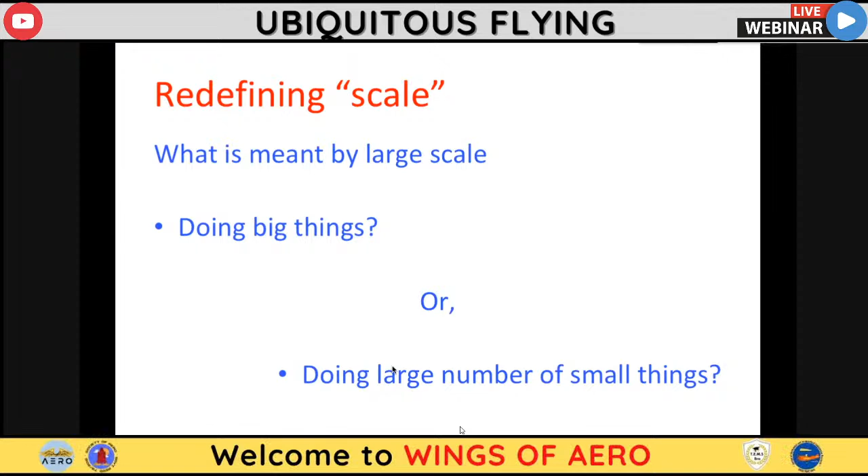What we want to do is redefine what is meant by scale. We want to see how to scale up things, and to scale up things, it is not required for you to actually make large things. You don't need to have a large airport, you don't need to have a large plane, you don't need to have a lot of things that are large. Instead, how about flipping it over and saying, is it possible for us to actually have a large number of small things? So start with small things, but actually make them in large numbers and distribute them all over. That's the kind of paradigm I'm going to be talking about in the context of aviation here.

So what is this talk all about? Technology drivers for the next generation of aviation is what we are going to be talking about. Fundamentally, there are a couple of enablers here, which is the leaner, meaner aircraft and engines enabled by 3D printing - metal 3D printing and 3D printing in general is very important. And the next thing that's actually a disruptor is electric aviation. Why is it a disruptor? Primarily because - and I'll pause here to point this out, it'll come back in a while, but it's very important to catch this early on in this talk - why electric aviation is a disruptor.

So if you look at the trends in electric vehicles happening today, we are still having electric cars being cheaper than IC engine powered cars. And we want to also look at the range you get with a single charge compared to what you actually get with a single petrol tank filled with petrol.

You will find typically that the ranges are getting pretty good, but still a bit short. So you're probably somewhere like 70-80%, and people say that's fine, that's fair, that's reasonable. In fact, if you think about how IC engine cars have performed, you probably don't need that range most of the time. It's just that you don't want to be filling petrol every day, and similarly you don't want to be charging your electric car every day. You might forget, you may have some problem, and so on. So you don't want to have this range anxiety. That's the issue they have.

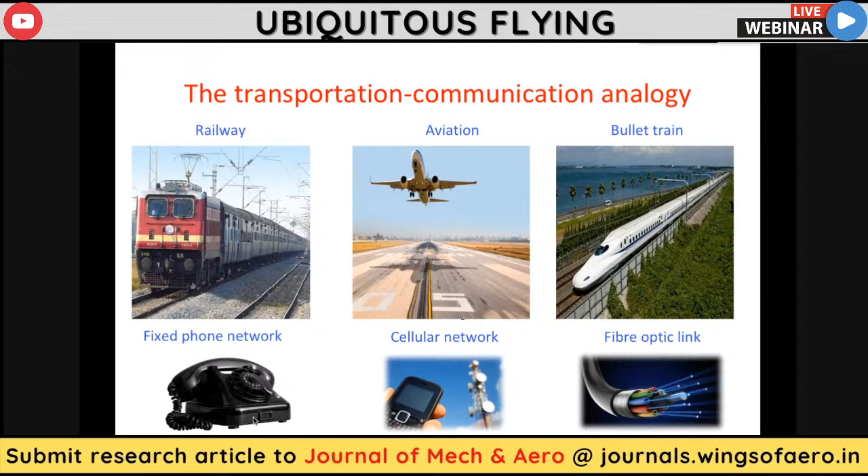Of course, the skies could get too crowded if you try to push this. So if you have point to point travel where you want to go very fast, you can do bullet train, or more recently Hyperloop is coming up as an even better option. That's for another talk some other day on how Hyperloop could be much better than even bullet train. That's kind of similar to a fiber optic link, and people actually do fiber optic links rather than go wireless all the way around.

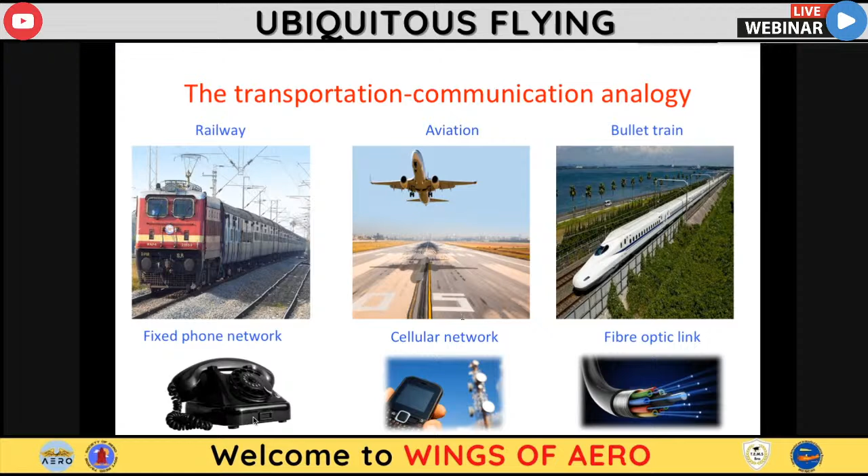And by the way, that's also changing. Fiber optic links are now getting replaced by small satellites, so you have a constellation of satellites that can do the job. So everything is kind of like, again, the large scale essentially is a lot of small things put together, right?

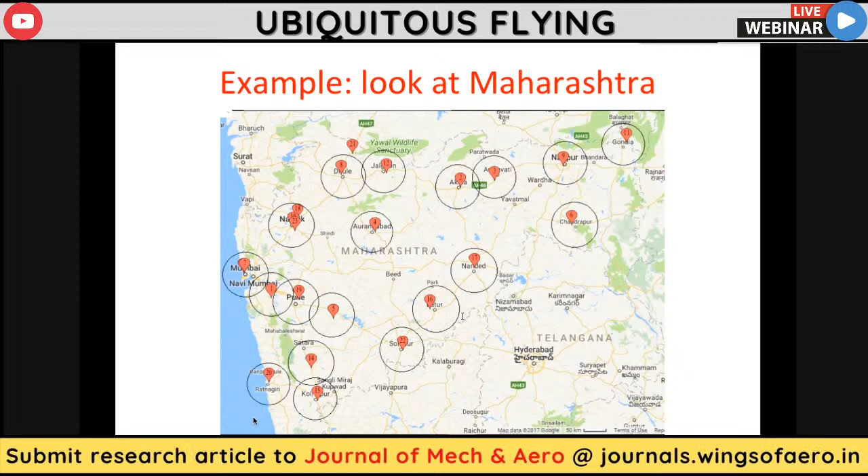So you can see very little gaps in between. Most of the people are actually within those 50-kilometer radius. That means they're always within about 25 kilometers of an airport or the other, if you can actually convert all of these things into airports.

And this is exactly what the regional connectivity scheme tried to do. They came up with a lot more new airports and new airlines and new services across these tier 2, tier 3 cities and all of that stuff. And they started off, but they've kind of stagnated. So we'll have to see why that is the case, why they're not able to push.

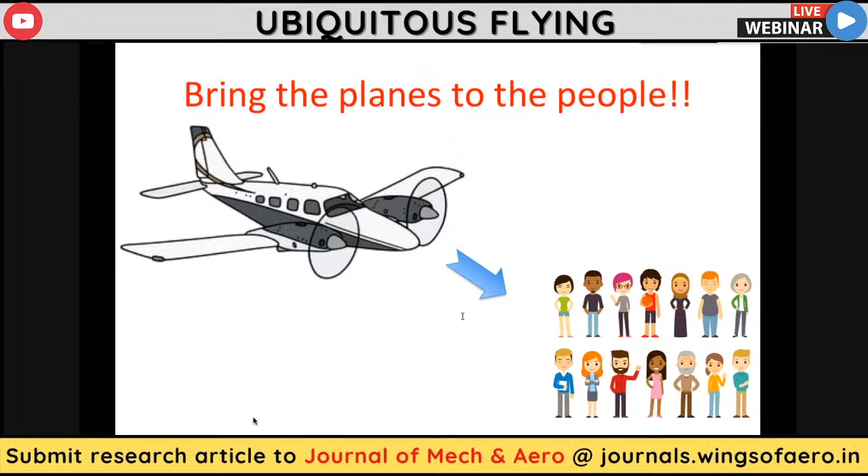This is the mini aviation that I'm talking about, which is regional aviation. And that's kind of not going too far, right? So we need to think out of the box here. Instead of the people going to the planes, like what we are doing today, how is it possible for us to actually bring the planes to the people? That's what we should be looking at.

Now, one of the ways of doing that is to aggregate planes. Now, I don't know if you have noticed, if you are taking off from Chennai - of course, it looks like a distant memory, I've not actually caught a flight in about 6 or 7 months now, as of today that I'm speaking, because of the pandemic.

But when I used to be flying a lot, in Chennai for example, there would be a bus that would crawl around the tarmac and then go to the other side. The time it takes for that to happen, you could actually go from Chennai to Bangalore itself. But along the way, you'll see a lot of private jets that are parked and just collecting dust. These are all probably owned by some rich men - similar to probably not women, unfortunately.

So these are all very similar to the way Uber and Ola have been, that is, there are these assets that are around. And you could actually operate something called NSOPs, that is non-scheduled operations, where you have an app and you just want to aggregate people who want to go from place A to place B and get them to go.

Unfortunately, we have to actually go to the existing airports that are busy again, and there's air traffic congestion that would be there and all of that stuff, unless we actually open up a lot of these very, very small airstrips and so on.

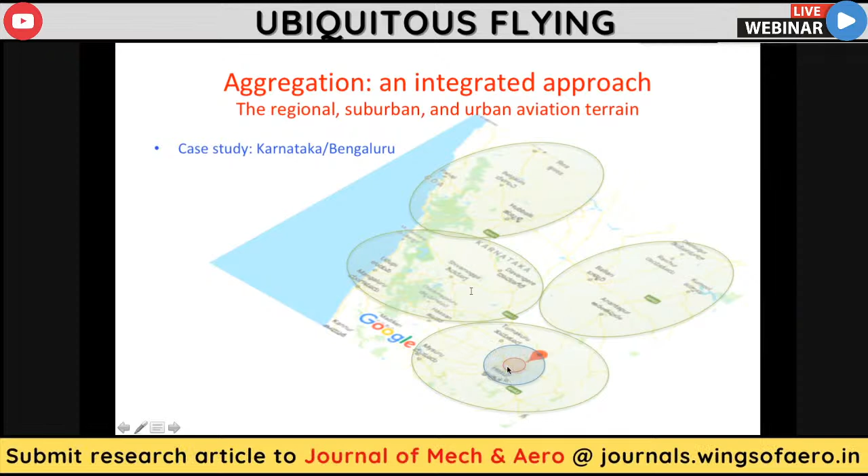So let's take Karnataka as a case study that we had done, where you see in this picture that we are looking at the table - the bullseye is actually around Bangalore, and then you have a sub-regional circle over there that is marking the suburbs of Bangalore. And then you have a lot of these other circles that are centered around other hubs that are possible.

The reason I picked Maharashtra and Bangalore, Karnataka, is important. All along the western coast of India you have the Western Ghats. So if somebody wants to go from Mangaluru to Bellary or Belagavi, they have to cut across the Western Ghats. If they go by land route, it's going to take forever. We'll show some data about that.

But if you look at regional aviation, is it now possible? If you pick Bangalore, is it possible for me to go to Tumkur? Can I go to Kolar? Can I go to Hosur? Can I go to Mysore? Can I go to Hassan? Shimoga, right? All these different places, Chittoor, Vellore - is it possible for me to go to all these satellite townships from Bangalore?

You can say the same thing from Chennai or any other city - Chennai to Kanchipuram, Chengalpet, Tiruvallur, all these places. And if you pick Madurai, you can go all the way to Kovilpatti and so on.

This is exactly what I was talking about. You see there are about 15 airstrips and helipads distributed all across - in fact, 21 helipads and 15 airstrips distributed across Karnataka.

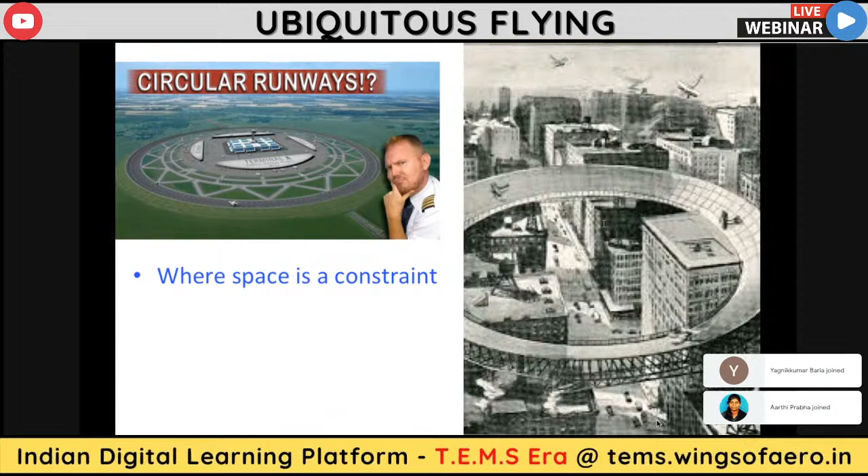So there you don't have runways. There, the concept of circular runways comes up - it's like you have a playground with a small building in the middle, and a runway around it, and that becomes an airport.

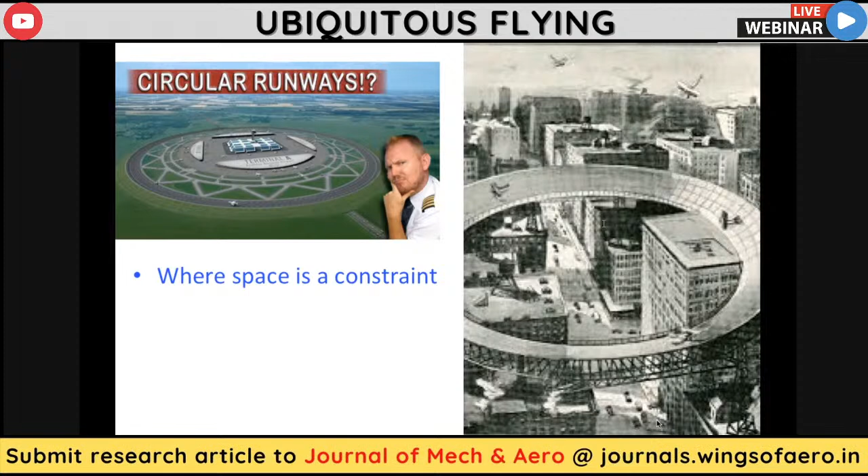In the case of places like Chennai, all your metro railway station tops are so long that you can actually have runways over them. So you can actually run planes from Saidapet to Chengalpet. You don't have to necessarily go to Meenambakkam anymore, and so on, right?

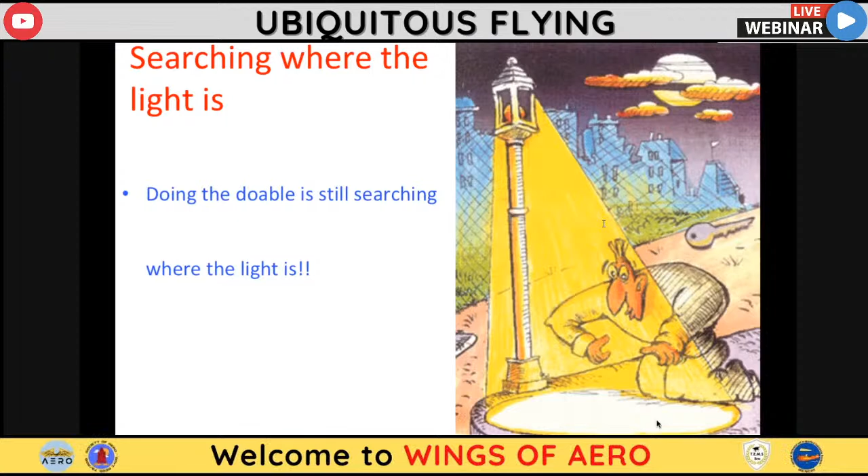How do you go suburban and intra-city to the city level? I talked about Saidapet to Chengalpet, but that's actually getting out of the city. But is it possible for me to actually even go from Saidapet to Adyar? If I were to take that one road, which is supposed to be less than 3 kilometers, it may take about 40 minutes in traffic, right? So is it possible for me to make this in 3 minutes, which is what it's supposed to take as the crow flies? That level of disruption.

In Sao Paulo, there's a company called Voom that's running 300 plus helicopters. Just to contrast, there are not more than about 180 civilian helicopters in India. So just that one city alone has about 300 plus helicopters.

That's a huge thing. Similarly, there is a company called Blade that is offering helicopter services in New York. But look at the cost. If you want to go to the airport, it'll be about $195, whereas an Uber cost will actually be about $50. So it's about 4 times almost, right? So is there a way by which we can disrupt that and get it down to almost like Uber?

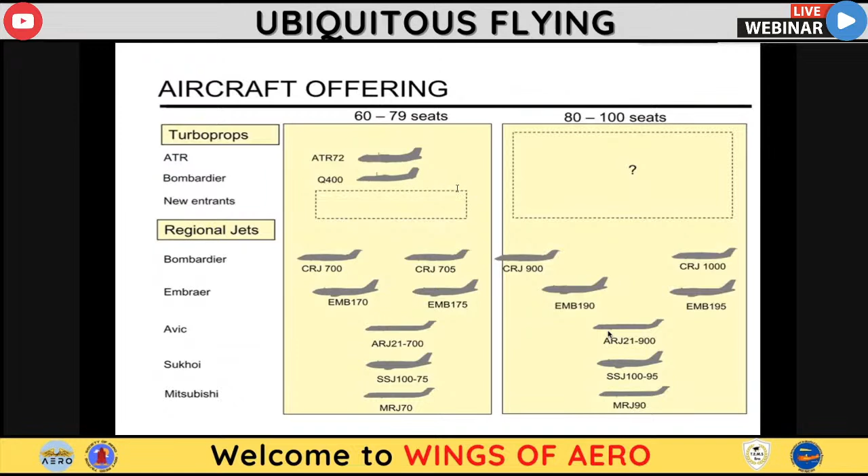And many of these aircraft are actually previous century vintage. They have been designed 30, 40 years back or even before. And they have just been sort of cosmetically modified for modern purposes, for all you can.

So the basic problem that we have had is they are too expensive to acquire, expensive to operate, need extensive maintenance, they can operate only from well-qualified airfields. There's a high fuel consumption and emission levels, and these technologies are, as I said, about 3 to 4 decades old.

So there is a need for a new regional transport aircraft, which is about 50% lower in acquisition cost, 25% lower in operating cost, 20% lower in fuel consumption, and 50% lower in maintenance cost.

So if you are able to actually make these kinds of planes today, there is a huge market that's just waiting to be unraveled, and people should be listening to this.

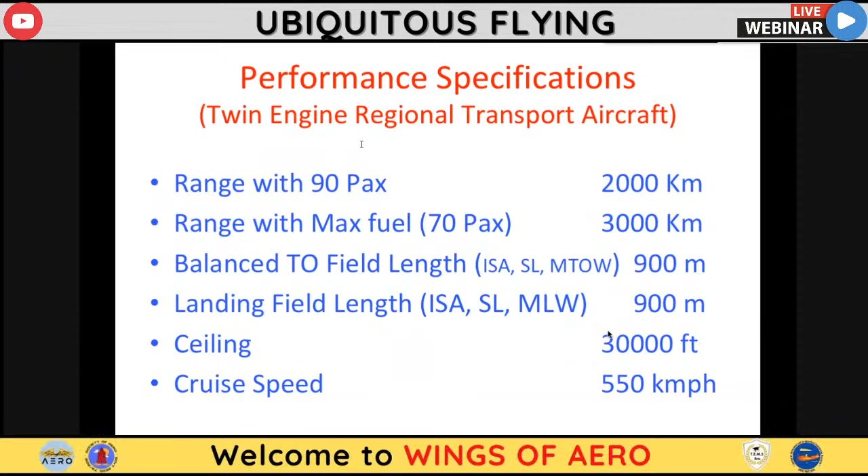And these are typical specs that you can think about for about a 90-passenger aircraft with about 2,000 kilometers range, with a max for 70 passengers, let's say the max fuel about 3,000 kilometers, and so on. So these are specs that we can think about. Ceiling is about 30,000 feet, cruise speed is about 550 kilometers per hour.

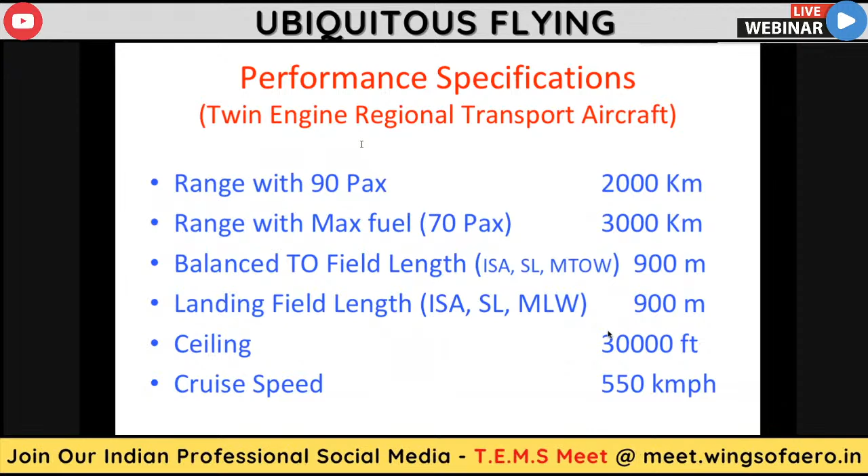So you can try to make it like, what should I say, a frugal aircraft, not necessarily one of the top of the line aircraft at all.

Similarly, gas turbines. So we have been working at the National Center for Combustion R&D, where we are trying to disrupt gas turbine engines by 3D printing, all the way up to doing the combustors. If I have the combustors 3D printed and they can withstand high temperatures over continuous periods without getting distorted, you should be able to actually make a lot of other parts 3D printed.

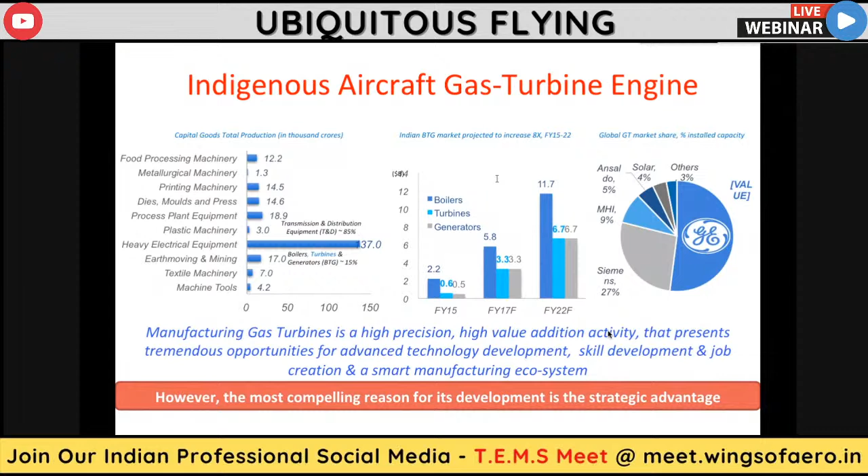3D printing simply slashes costs, because these are high-tech equipment with a lot of precision machining required, precision assembly required. So if it's possible for us to cut down the amount of metal being used in terms of raw material, because it's additive manufacturing, and you cut down the requirement for precision assembly and precision machining, all of these things, the manufacturing costs will simply come down drastically when you try to use 3D printed parts for gas turbine engines. That's one way by which we could disrupt it.

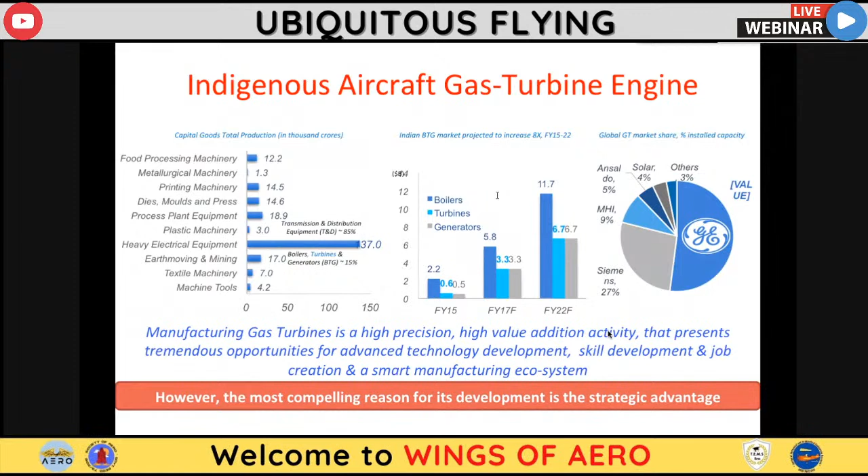Helicopters is what we've actually been seeing, and these are fundamentally complicated machines, and they are supposed to be like hovering machines. You have one big rotor at the top that is actually trying to hold it up in the air, and then you try to move slowly by tilting it forward with a small component, and go forward. So that's very complicated, and then of course you have to worry about tip speeds, tip Mach numbers, transonic buffeting, all of that stuff, and then the mechanical swash plates and all that stuff.

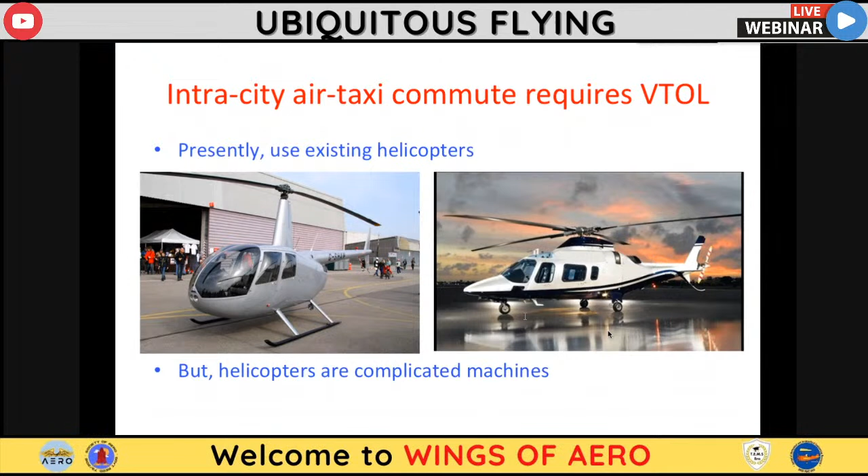It's a mechanical engineer's delight, but an aerospace engineer's yuck, because we always want to have as few moving parts as possible. We want to shape things and get the airflow to go around these shapes, or go through these shapes like airfoils and nozzles to get our job done, or fan blades to get our job done, rather than brute force try to get things done.

So that's exactly where the new age eVTOL is coming up. E for electric, VTOL for vertical takeoff and landing. There are lots of such implementations that are being developed in the last several years. Uber has put out a white paper called the Uber Elevate, and they're working on this program aggressively, trying to partner with a lot of these players. There is Lilium, there is eHang, Zunum Air, Volocopter, and so on.

Now, what's so special about these planes? So the electric planes can now be cheaper. I think I gave a primer for this right at the beginning. Electric planes can actually get cheaper than helicopters because the number of parts, the complexity of operation is cheaper, and could push more E-planes into the market than helicopters, because fundamentally you can view them like cars with wings and rotors.

There is also one more fantastic advantage with electric propulsion, which is all you have to do is simply run wires to different motors. You don't have to actually transmit the shaft power through shafts and so on. It's not mechanical transmission, it's electric transmission. So what it essentially means is that you can now distribute the propulsion. Instead of having one large propeller, you can have a lot of small propellers.

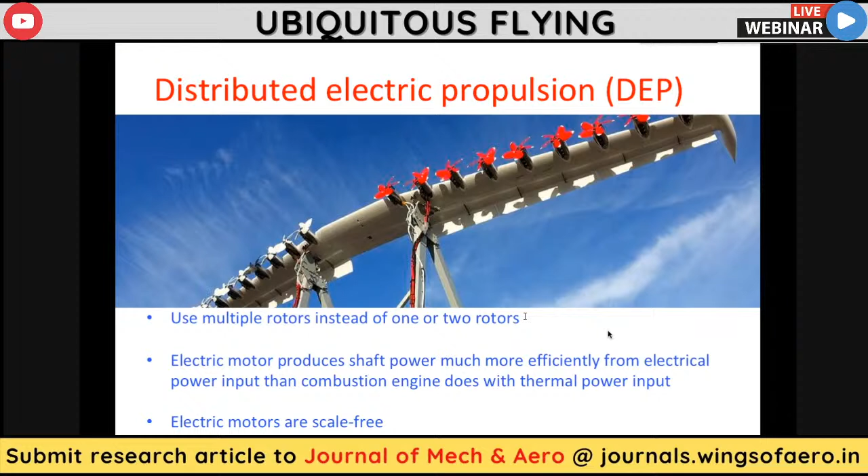And what the distributed electric propulsion concept tries to achieve, through a lot of work funded by NASA, is to arrange these small propellers in front of the wings, so that the air that is blown along the wing span over the wing can actually enhance the lift that's being produced by these wings. So this is all of a sudden an aero propulsion integrated architecture.

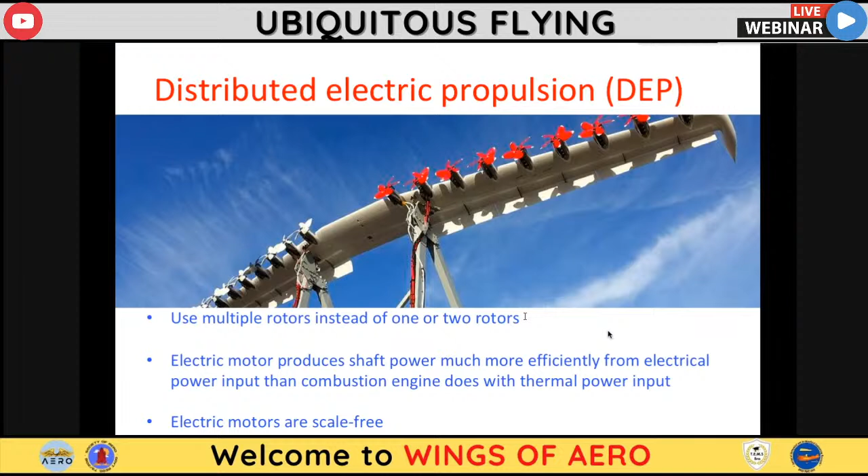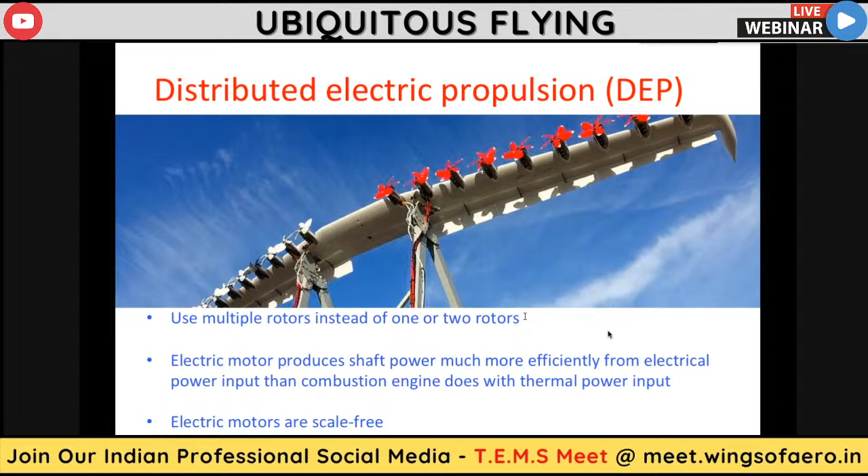So this technology is an emerging technology. It suddenly enhances the lift that's produced, so you don't need to go very fast in the first place, or you can have compact wings. A lot of advantages are there. Fundamentally, electric motors are scale-free, so you get extremely good efficiencies that are possible at different speeds at which this can operate.

Now, what can E-planes do? That's a question that we also actually looked at, because we can't pack too much battery into the plane, otherwise the plane will get too heavy. So E-planes actually cannot do a lot. That's essentially currently the situation.

It may travel at about 150 to 200 kilometers per hour. I think Lilium or Joby Aviation does about 300 kilometers per hour, because they want to actually generate a lot of lift with the wings that they have, where they're trying to make the wing compact for urban aerial mobility and so on. And we can get endurances of the order between about 15 minutes to 1 hour. That's about it. But when compared to these, the combustion planes are actually a huge overkill.

And we don't even know whether that's required, but this doesn't look like it'll match up to anywhere there. So what do we do with it is what we have to ask. So we actually need some reserve battery for redundancy, limited by the battery pack, that can fit within available real estate or weight. And there's also a charging time limitation, or we have to worry about how we can reliably do battery swapping without any loose contacts in midair subsequently.

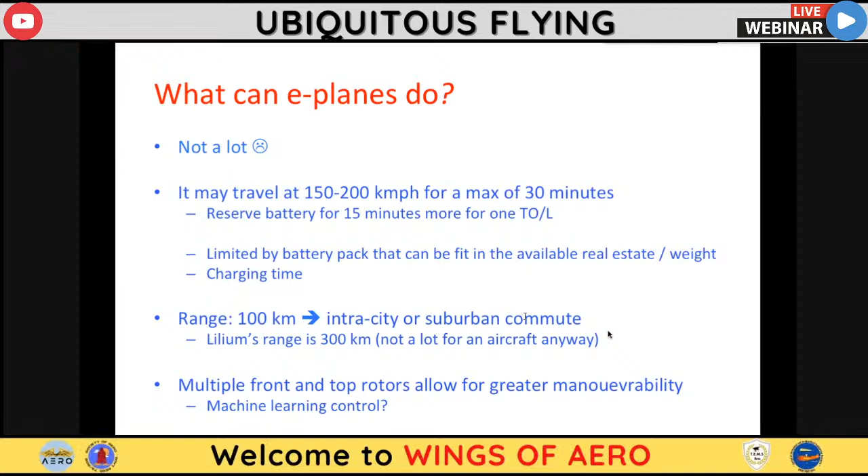So the ranges are of the order of about 100 kilometers, 200 kilometers, 300 kilometers. Whereas a four-seater Cessna with an IC engine, single nose propeller can actually go 1600 kilometers. That's about more than 4 times what the Lilium can do.

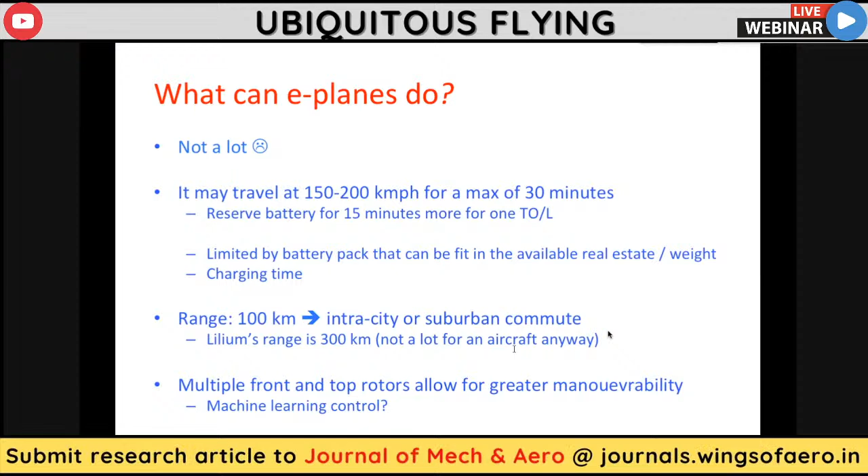Now, there is a lot of possibility for control with all these different motors and so on, but that's for the future. So what we did was we actually tried to understand this whole thing.

So for economic purposes, what you will find is as the number of passengers increases in the aircraft, you will definitely want to have higher range. But when you now go to the lower number of passengers, you see a huge cloud of data over there, whereas there is a wide range of range that you can see anywhere between not exactly zero, but close to it — these are all IC engine aircraft, by the way, existing aircraft.

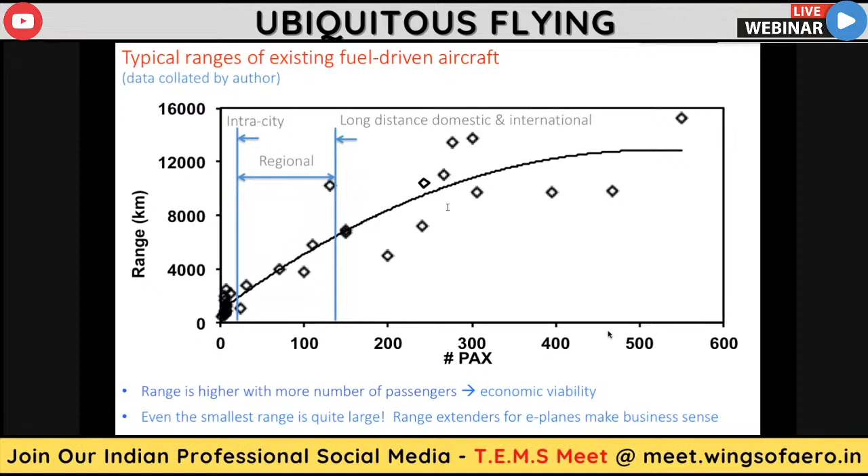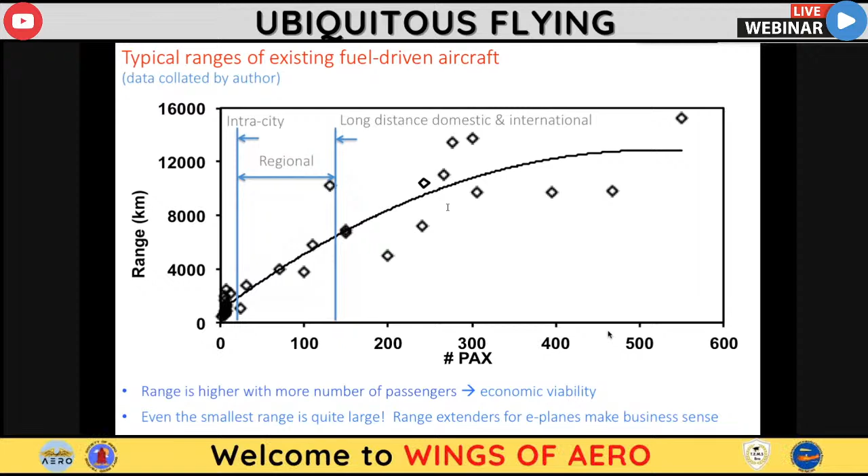So in the case of combustion aircraft, the problem essentially is even the smallest aircraft actually has a large range. And that's where our mind is warped, thinking that we always need a very large range, which may not exactly be the case. If you now look at what you can do with existing aircraft and then simply electrify it.

So there is a formula that you can derive, and I can boast about an electric aircraft propulsion course that I have actually offered. I think I will also try to put it on YouTube. It's been video recorded for the first time, where we actually derive this range formula and all of those things. You can clearly see E star is the energy density, so the better the battery, the greater the range you will get. You need to have better efficiencies, which means you want to be more aerodynamic, you want to be lightweighted, and so on. A lot of these different factors are coming up over there for the range.

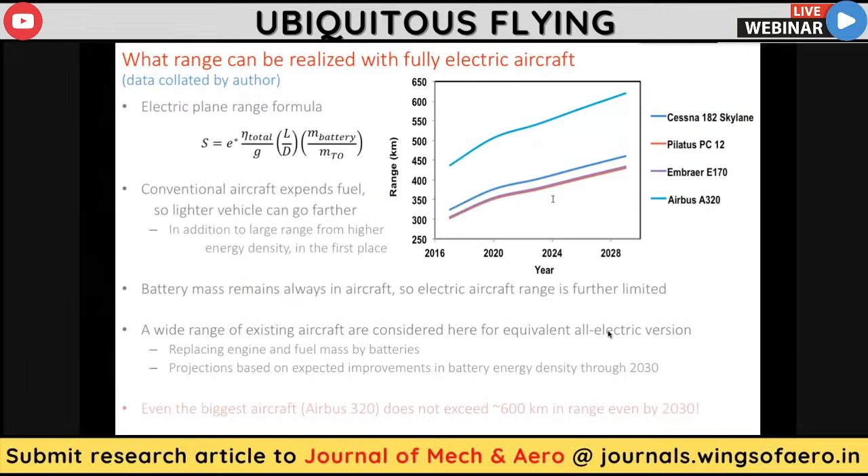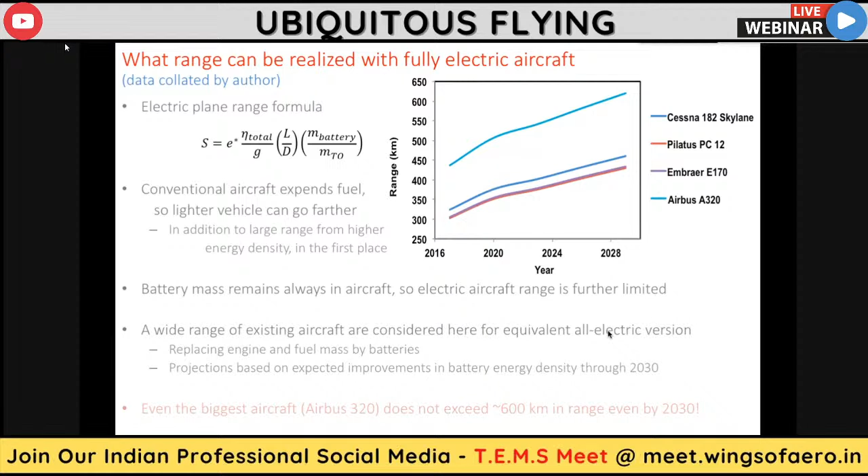So applying this to existing aircraft by removing the fuel tank and the engine, if you now try to find out, taking a certain approach to what will be the trends in battery energy density growth, you see that right now we're not anywhere more than about 300 kilometers with existing aircraft for, let's say, a Cessna or a Pilatus or an Embraer and so on. Airbus is probably about 450 kilometers. But if you actually look at the combustion aircraft range, it'll be huge compared to 450 kilometers.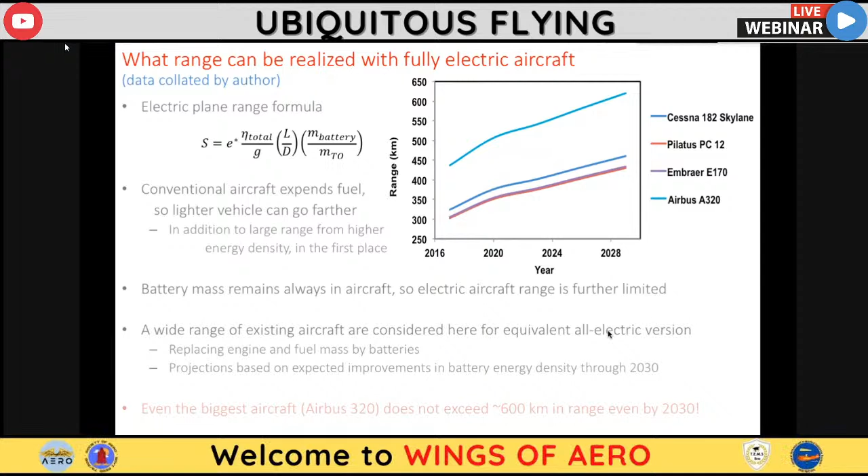And even if you now wait for another 10 years through about 2029, 2030, you will find that the ranges are not actually going anywhere past about 400 kilometers or 600 kilometers, right? So this is actually the fundamental problem that we are facing with electric aircraft as far as the range is concerned.

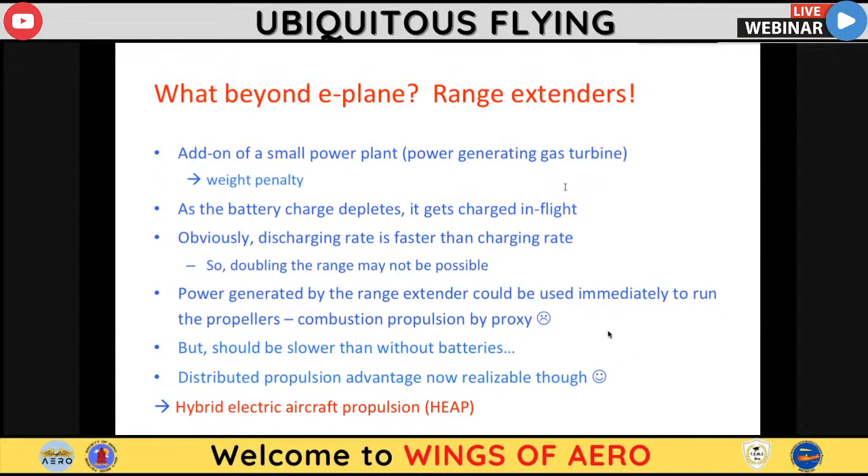So you could use things like range extenders, where you can now use a small power plant that can connect with the battery and then work together with the battery and so on. And you can get into the concept of a hybrid electric aircraft. There are a few people who are actually trying to do this. A lot of people that we showed as the eVTOL guys are actually trying to enter a market of urban aerial mobility in order to say that it's okay not to have that range.

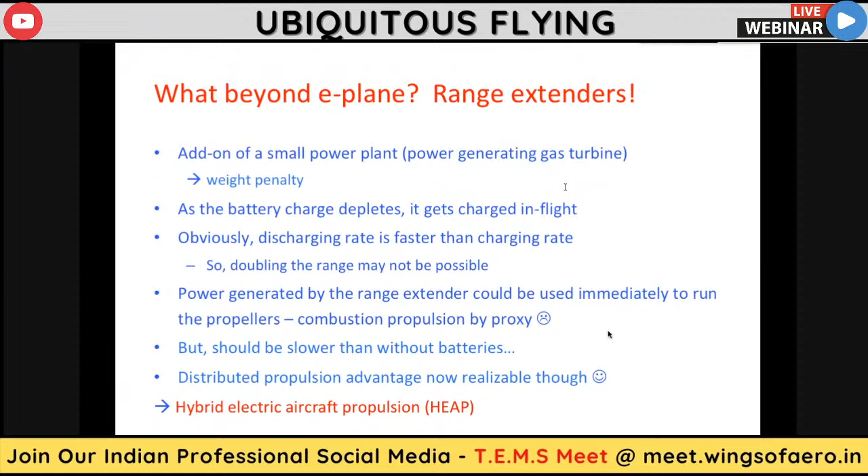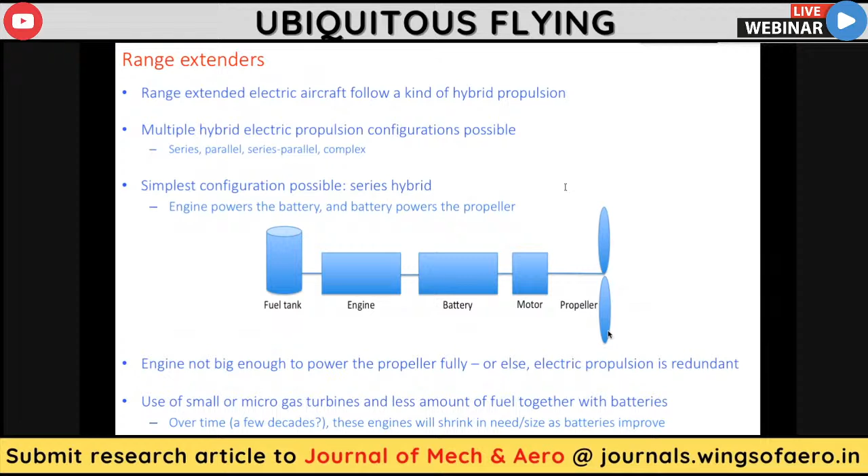But if you want to have the range, today the answer is hybrid electric aircraft to some extent, and we will see some numbers there. So we did some analysis of series hybrid aircraft where the engine could be used as a range extender. The reason why this is actually a very nice concept is because, first of all, I will still have an electric aircraft front end, so I can still run wires to these different motors instead of actually having a parallel shaft connection from the engine to the batteries in a parallel connection.

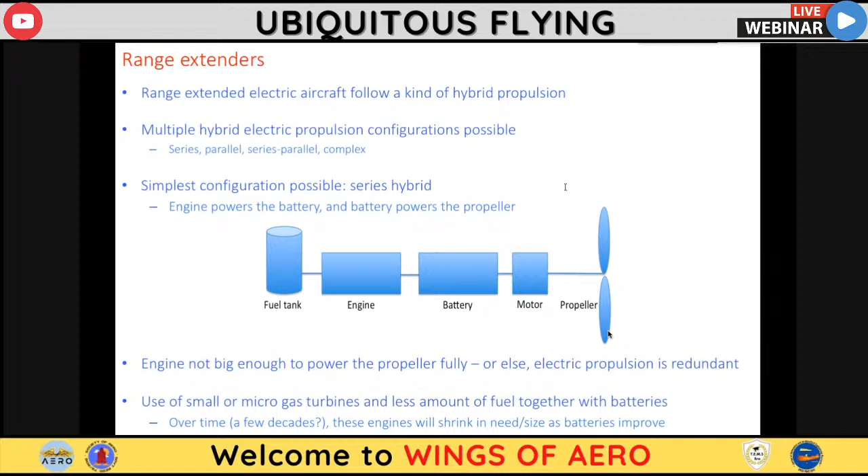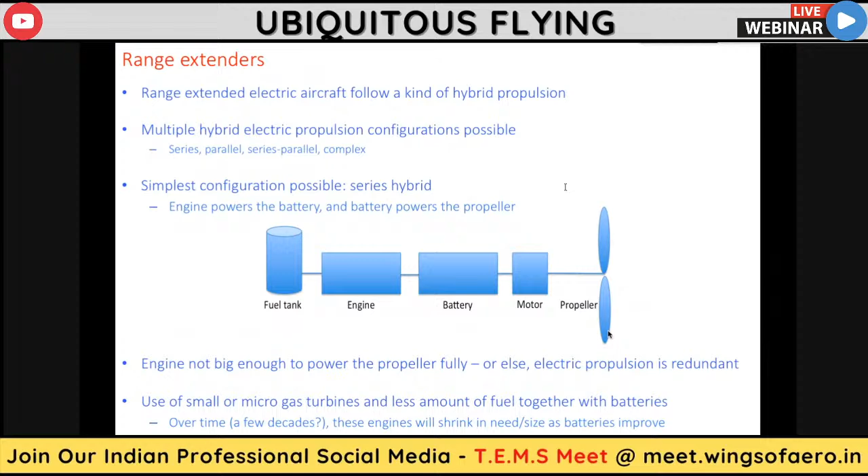But of course, you can also have an electric parallel version where you can run wires. That's one thing. The second thing is I can actually afford to progressively shrink the engine as my battery technology grows, so the same aircraft architecture can remain, but its range can be extended progressively. So this is a very nice idea that we could think about.

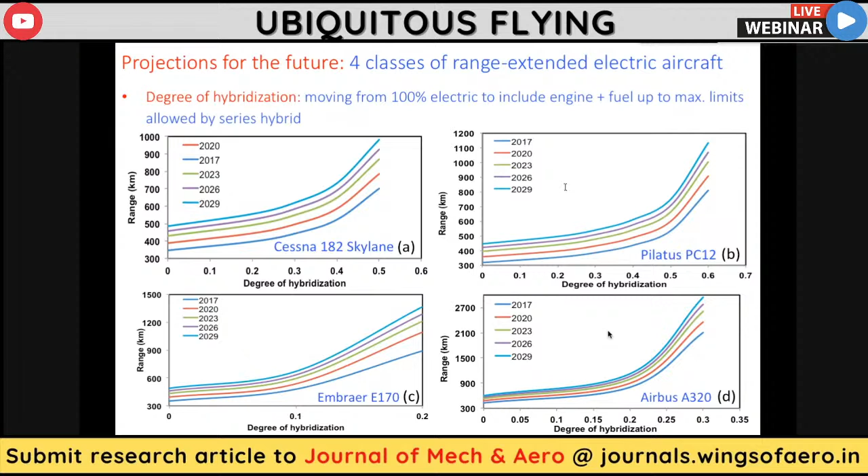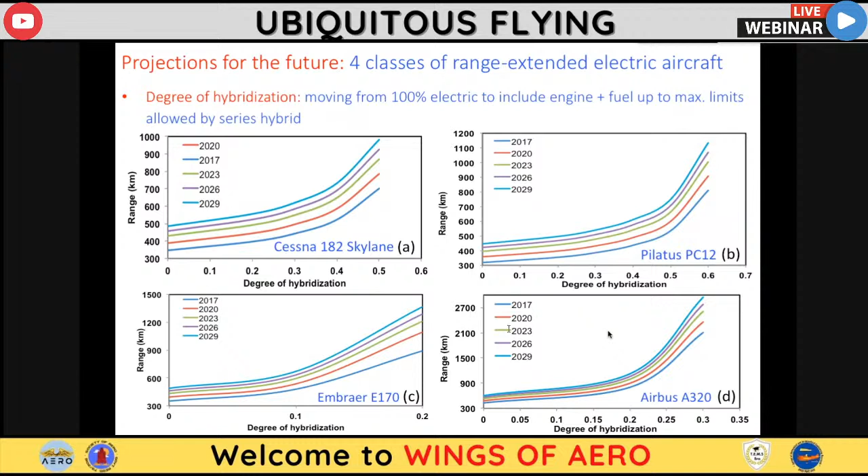And lo and behold, we can actually see that the ranges can actually increase significantly for, let's say, the 4 aircraft that we took, when you now try to increase the degree of hybridization. So when you say degree of hybridization, that means like a 0.5, 0.6 kind of degree essentially means that you're having a fairly larger engine and a smaller battery pack, as opposed to a 0% degree of hybridization, which is full electric, whose range we saw a couple of slides back. So the moment you actually try to hybridize more and more, and spend more time over the next 10 years waiting for the batteries to improve, you can see that the ranges take off, but still not getting anywhere close to the current ranges at all.

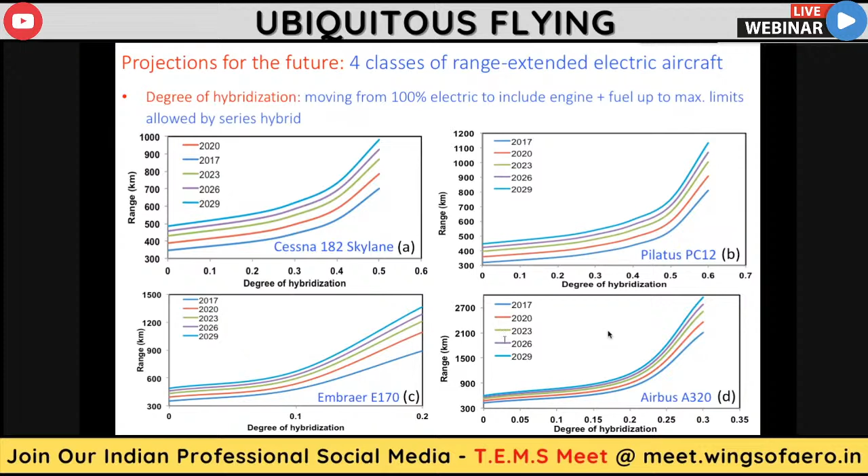That's the current situation that we have.

So what we do is a two-seater eVTOL instead of a four-seater or five-seater conventional aircraft, and we promise to have a 200 kilometer per hour aircraft, meant for urban aerial mobility. This is our starting point, and progressively, as batteries get bigger or we go hybrid, we can make these eVTOLs that take off and land in cities in congested spaces. Our targeted wingspan is fairly compact, around 4 meters.

Whereas if you want a regional or sub-regional aircraft, let's say up to about a 19-seater, VTOL is probably not a good option. You'd want to take off from runways which could be circular runways in parks, metro station tops, or lakes - any of those amphibious aircraft varieties. All of those are possible.

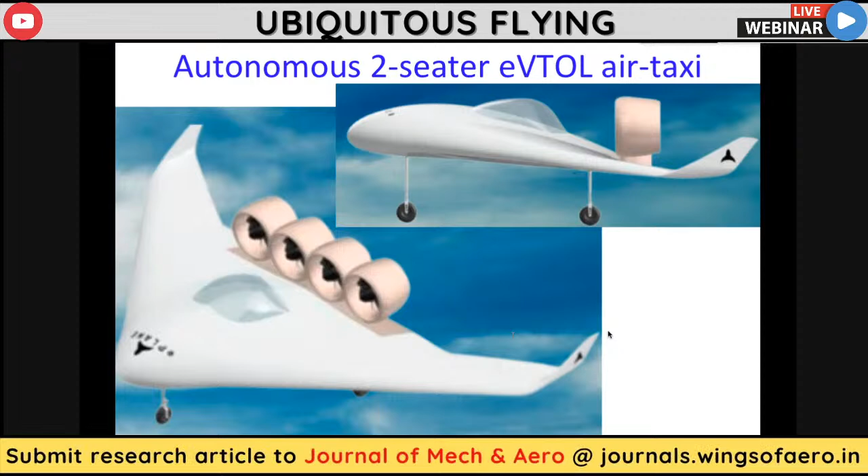So the next big idea is what I call the inverse swarm. When I think about this, essentially I have an aircraft that is fully electric with no range extender - meaning no combustion at all. I'm taking off from my doorstep vertically, but I want to go from Chennai to Bangalore. My aircraft can only go 200 kilometers, which means it won't even cross Vellore, let's say. I can't reach Bangalore.

So what I'd suggest is, in the future, you could have one combustion aircraft taking off from Meenambakkam, but nobody actually goes to Meenambakkam. People take off from VTOLs at their doorsteps, but it's all scheduled so that all of them head towards Bangalore, rendezvousing with the aircraft taking off from Meenambakkam around that time, and start getting mid-air recharging. This technology is just picking up now - powerless, wireless charging.

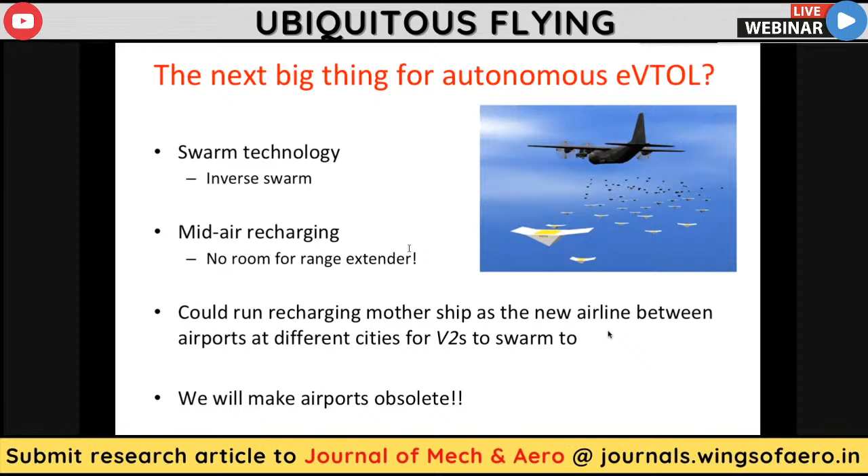So you keep getting power generated in the big aircraft and keep going toward Bangalore. When you're near Bangalore, you split apart and go to your respective places, landing vertically. This essentially means nobody goes to an airport anymore for takeoff or landing - we simply make airports obsolete. This is how we'd try to disrupt the aviation scene with electric aircraft.

So what we talked about today is: on one hand, conventional propelled aircraft, and on the other, electric aircraft. We could make 3D printed gas turbines in India, which would disrupt gas turbine engine costs - currently about half the cost of an aircraft itself. We need to start making regional aircraft in India too, propelled by 3D printed gas turbine engines made in India, feeding into the regional aviation market.

On the other hand, looking at electric aircraft, you can have fully electric or hybrid aircraft. Fully electric aircraft are reaching the ranges required for regional aviation as batteries improve. There's a lot of new chemistry coming up that isn't lithium ion anymore - people are thinking about lithium oxide, lithium sulfur, sodium-based batteries, or metal air batteries like zinc air, aluminum air, or lithium air. A lot of these batteries have much higher specific energies compared to lithium polymer or lithium ion.

Lithium ion and lithium polymer were primarily perfected for commercialization from a pocket electronics point of view - when the Walkman, the transistor radio came, then progressed to the CD Walkman, then iPods, mobile phones, smartphones, laptops, iPads, or tablets. Those are the devices where lithium ion is pretty good.

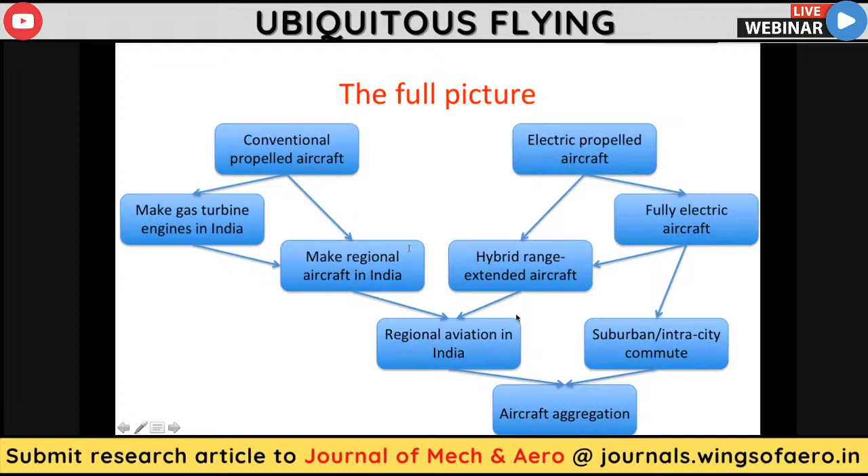We have been trying to do a brute force technology fit with lithium ion into electric cars and then thinking about them for planes as well. That's a problem. If you don't look for new battery technology, you won't be able to do fully electric regional aviation, but we can definitely do hybrid, and fully electric for intra-city and suburban commutes.

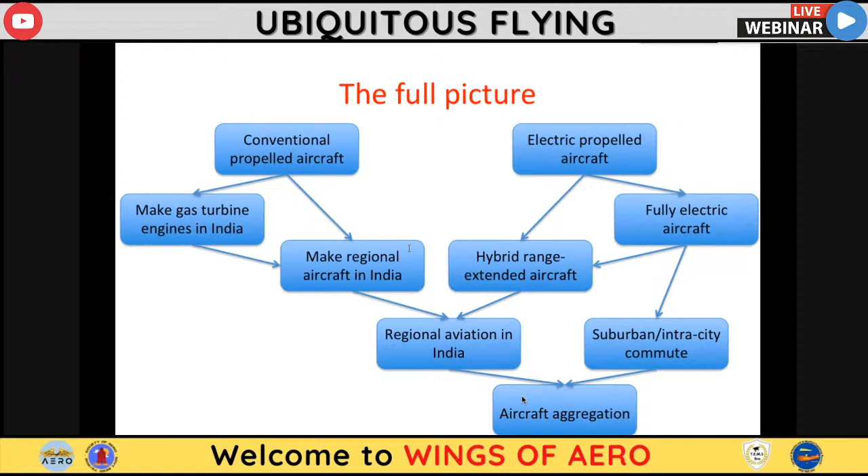All of this, regardless of which way it is, can be run as NSOPs, non-scheduled operations, as an aggregation. This means you have an app and people sign up to fly at a particular time and show up at a particular place, not very different from an Uber or Ola. Maybe you'd go a little farther from where you'd normally get picked up to start, but eventually it could be as close to your doorstep as current Uber or Ola within the next 5 to 10 years. That's the kind of outlook.

Now, this is not just a talk; it's actually a to-do list, and what are we doing about it? One thing I talked about is the 3D printed engines. I'm actually working as part of a fairly large consortium of different stakeholders trying to kickstart a manufacturing base here for 3D printed gas turbine engines. That's a big thing to start with, and of course that can spawn aircraft manufacturing as well.

The other thing I do is run a startup company I co-founded called the E-Plane Company. Let's quickly look at what the E-Plane Company does. We talked about the two-seater sometime back, called the E200, but what we did last year was a proof of concept with a 6 kg payload capability, which has a VTOL as well as fixed-wing hybrid aircraft design.

What we are currently doing is developing a 50 kg payload capacity of the same kind, which can take cargo and fly autonomously. Sometime next year, or early the year after, that's 2022, early 2022, is when we would try to do the 200 kg variety that can go all the way to taking about 2 people.

Initially maybe human piloted, which means it's only 1 paid passenger. But since we are doing this out of India, there are a lot of reasons to believe it would still make economic sense. A lot of Uber rides are actually single passenger rides, so very similarly, we will be able to make that happen.

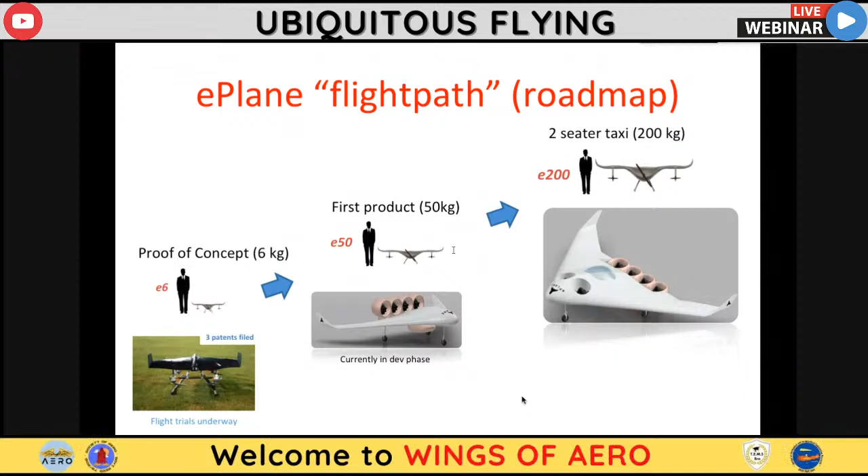The second thing, of course, is we can eventually go fully autonomous when certification permits. Then it will simply disrupt aviation because it gets rid of the pilot cost, the fuel cost, and the maintenance cost. The capital cost is also fairly low, as we talked about for electric aircraft compared to combustion aircraft.